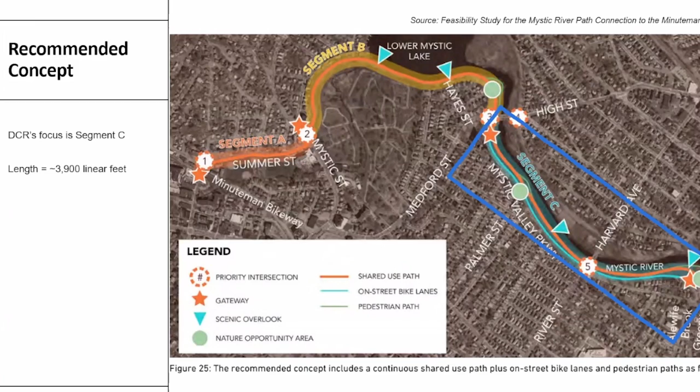Yep. Thanks, John. And then we selected the segment from where Alewife Brook Parkway comes out near the confluence of the Alewife Brook and Mystic River up to High Street, mostly because this work could be done completely out of the road right of way. For the other sections, to put in a path, you have to change the road cross section, and that is just more complicated, involves more departments within DCR, and has a higher cost. So we thought we could do this section pretty nimbly because it's all within the parkland that DCR owns. In fact, half of the stretch already has a gravel path and the rest of it is a desire line path. So that's why we're starting with this section.

In a separate effort, I'm working with our parkways team at DCR to stripe bike lanes along the road to hopefully slow down cars by narrowing the travel lanes and allowing a space for bikers that are faster, maybe e-bikes, because that's a growing concern about mixing all the modes within the parkland paths. And then we'll go right into the preliminary design, and we've highlighted all of the resource areas, and at the end we'll have a summary of all the potential impacts and a couple of questions that we have. So if you're okay with me driving, Elise, I'll go to the next slide. Yeah, go for it. Yep. All right.

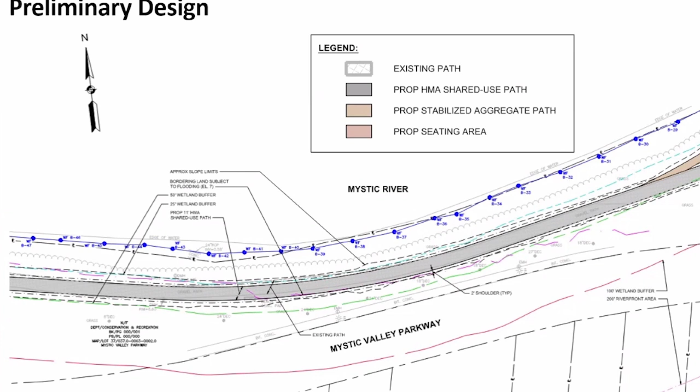And as we get closer to the end here, where we are meeting up with the crossing at Alewife Brook Parkway, there's a lot of parkland and not a ton of trees in this area. So it might be a good idea to create a great area for maybe some seating, do that stabilized aggregate path, maybe some signage. Any of that type of stuff would be great at this location.

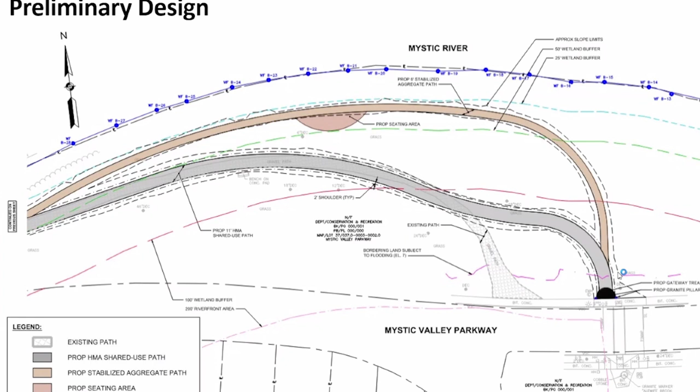And one of the things we noticed is this whole area up near the crossing of Alewife Brook, because the existing path comes up just to the left of that crossing, as shown in this graphic. That whole area is dirt because people just cut right up through there. So the idea would be to align it more with the crossing so people would hopefully stay on the path getting to the crossing and just continue across, and hopefully keep that grassed area more grass.

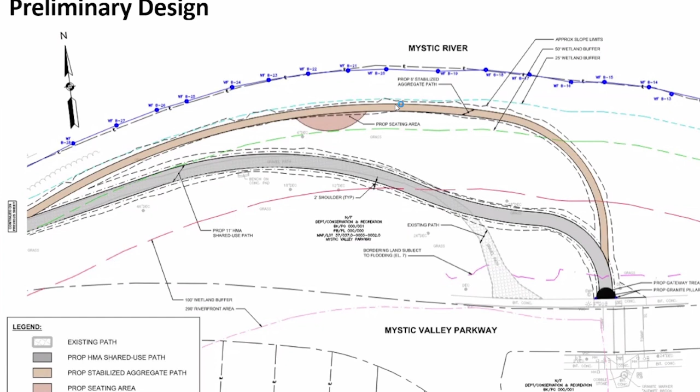Another element from the feasibility study was identifying overlook and seating areas, referencing where people are going to the river now for views. So that's why we came up with having that seating area there. So the next set of plans is ultimately the same set, but I tried to highlight something different. This gives us an overview of where we are impacting.

So the resource areas that we focused on at this point, and we have shown in all these different colors, and I think we're happy to share the plans with anybody if they want to look at these. It's very hard to always zero in on stuff on a screen when you're making a presentation. So happy to share the preliminary drawings if that helps.

But we're showing the 200-foot riverfront area, 100-foot wetland buffer, 50-foot wetland buffer, 25-foot wetland buffer. Our wetland line is in the bright blue along the bank. And then we also have bordering land subject to flooding at elevation 7, which is another aspect of what we are working through once we get the alignment set, is how will we compensate for any impacts to the floodplain in this area and where those impacts occur.

So we quantified what we have at this point, and this was already after us going through this process a couple times of looking at where is the alignment, how is it laid out, which buffer areas are we impacting, and we have it summarized, I'm going to say generally at this point, just to get an idea of where we are at. So I tried to highlight different spots because I wanted to focus on different things to explain why we made the choices that we made and why these impacts are occurring.

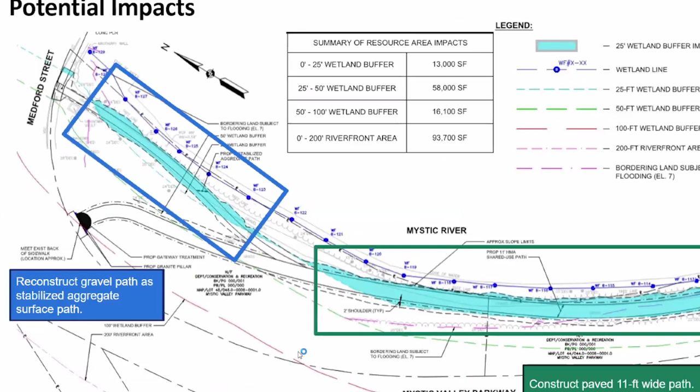And this is one of the reasons, if you want to go to the next sheet, Amber, this is one of the reasons that we tried to start pulling the path away, so we could get the path out of that 25-foot buffer. So on the left here, the green box is a continuation of the previous sheet. And then getting into this area, you can see that light blue line ends up now on the top side of the path. So we've been able to pull the path back out of that 25-foot buffer and get it between the 25 and 50-foot buffer.

We're still making an impact in a buffer zone, but we're at least able to pull it away from the river some and not have folks so close to the river. And it's an opportunity to really restore some of the vegetation through there and be specific about what points we want people to maybe have that access.

I will note too, this existing conditions gravel path is really a spectrum of how you define a gravel path, because further down by Alewife, it feels more like a real gravel path. And here it's almost like compacted earth. Maybe there was some gravel, just to acknowledge that it's a little different, but either way, it's very compacted, if not actually fully gravel. So just to point that out.

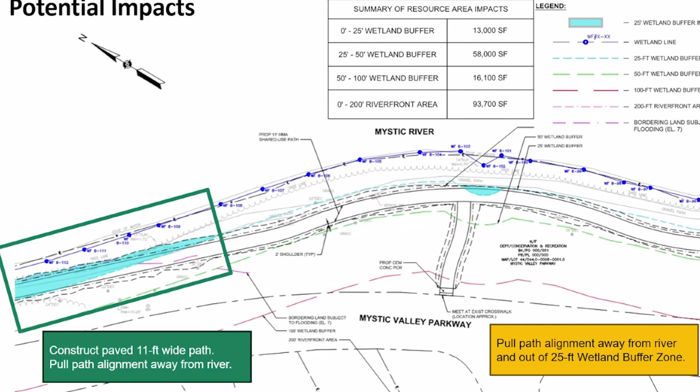Okay. So next slide, again, this highlights, and I took out the shading from the previous plan set just because it was becoming way too much and difficult to look at and explain. But you can see that the gravel path would be closer to the existing path, is closer to the wetland line. Thank you, Amber. And we tried to pull the path out of that as much as we could. So the only area in there that we're really impacting is some of the grading, the shoulder, and it's likely to be a grassed area through there.

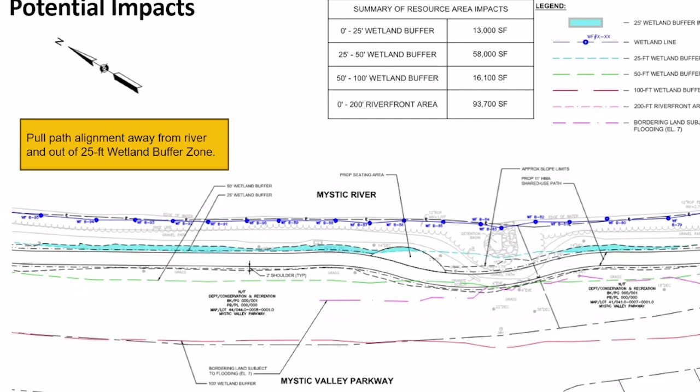So that was our main goal, anywhere that we can pull it out of the 25-foot wetland buffer without impacting trees and having to really overhaul the land. That was the approach that we took through here. Yeah, so that's another thing, we're aiming not to disturb any mature trees, because there's quite a few in here. We know that's a really critical part of this parkland.

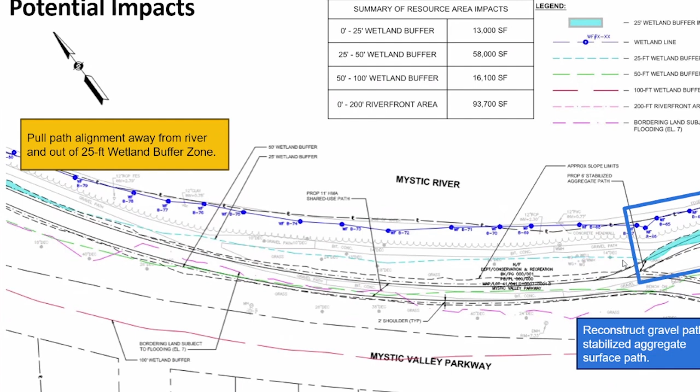Yeah, and so this same thing, we pulled the path here completely back out. Some of this area is even pulling it even further out. And then again, as we approach River Street on the right, we have that gravel path that we're maintaining through that stretch there to get up to the River Street Bridge to go over the river. And that is an impact there, but the path exists there today.

Similarly, on this other side, again, we're still in preliminary design, so we haven't really gone through some of these slope limits with a fine tooth comb, but this is an area that I see that we can likely get rid of that impact in there, pull those slope limits in, and just really get into the weeds of the design as we take it to the next step.

I had a quick question on that last plate. Yeah, sure, Mike. The aggregate path seems to stop at River Street and continue on the other side. Is there no direct connection? It connects to the sidewalk on the bridge of River Street that goes over. Our survey limits only go so far, so you can't really see it in there, but there's a sidewalk there that it's connecting to, the back of that sidewalk.

So people will have to sort of get off their bikes and walk across, is that it? Well, that's what I was alluding to earlier, is that the main path is going to direct most of the traffic here to this crossing, rather than, it almost looks like people might cross mid-block there. But this is really designed for the desire line that's connecting to the sidewalk that's going across the bridge, if that makes sense. Got it.

Yep. Yeah, it kind of depends on where people are going. We were out there doing several site walks. We saw people just walking straight up there and walking over the bridge. And there might be some people with bikes, however they choose to do that. But the main line is essentially along Mystic Valley Parkway. And there is no curb cut here either. Yes, correct. Next slide?

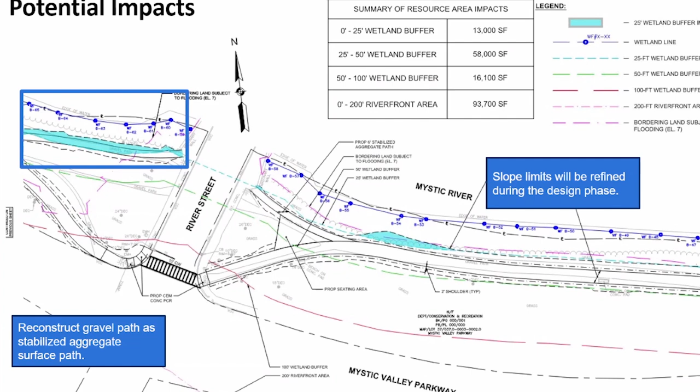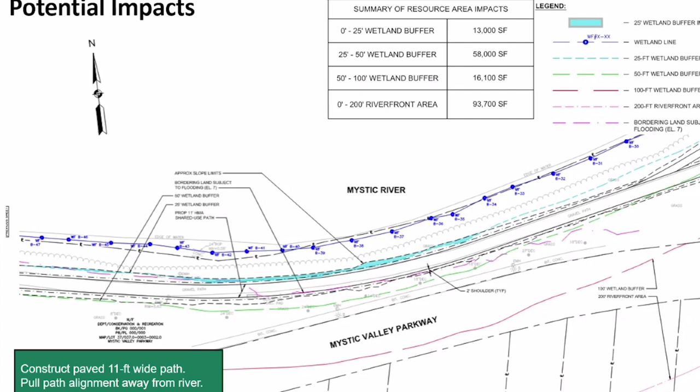Yeah, okay. Continuing on. This is a section where the gravel path, we've essentially kept the limit of that existing path today, the side closest to the river, and just tried to populate it on the opposite side closer to the road. This is where it starts getting into that section, like Amber was referencing, where the gravel looks a little more put together and it's a little wider. So essentially we're just trying to pave what is a gravel path today in this stretch, and we'd be making it a little wider because I think it's probably only about 9 or 10 feet now, and we're looking to do an 11-foot width. So then as we get to the crossing here, both the gravel path and the paved path, we're able to keep that out of that 25-foot wetland buffer zone.

And then I would say this area is probably the only area that we are adding something, and it's because we're doing the dual path through here. So where there is essentially a 10-foot wide gravel path through here, we'd be putting an 11-foot wide paved path and then a 6-foot wide gravel path.

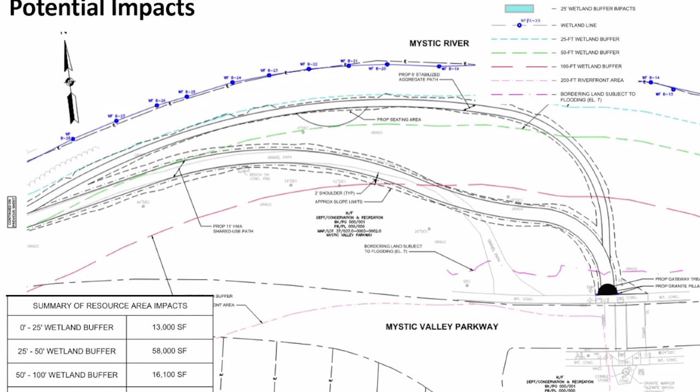So we talked about it amongst ourselves, John, Carl, David, and I, about, should we take out that sidewalk if we're putting in a new facility along here? We also want to discuss that in the context of permitting. Yeah, and I think there's a picture of that on the next slide. Yep. Amber, if you want to. Yeah.

So this is a picture of that sidewalk, just one part of it, but it goes essentially, like Amber said, from that crossing to Alewife Brook Greenway to River Street. And we just did some quick calcs to see, okay, if we wanted to remove that and replace it with, say, grass, make it a pervious surface, to offset some of the impact of us adding a paved surface in the parkland, we'd be looking at reducing the impervious of what we're adding by about 9,400 square feet.

So I didn't break it down. I was saying to Amber, we didn't break down the numbers super specifically and get into the weeds, which we will when we get to the point of permitting for this, but just wanted to give everyone a general idea now of, what is our impervious area? How much are we adding? And is this a way to offset that some by reducing impacts and removing this? We're not sure how many people actually use this sidewalk. It seems like maybe if there's a paved area through the park, people might be more likely to walk through there.

So, right. I think this is the end of our presentation pretty much, and then we'll take any feedback, thoughts, questions that anyone wants. Is this the last slide? Yep. Okay. Thank you. Yes, we could stay on this slide maybe. Thank you. I'm going to go to commissioners. If there are commissioners that have questions, I know I have a few, but

Anybody else? Dave Kaplan? Yeah, as far as getting rid of that existing sidewalk at the street level, I think there's a good opportunity there if you have alternative means of transportation, and like you said, could be a good offset, or maybe an opportunity for a pollinator pathway and not even grass or something like that. And also just wanted to comment, it looked like a decent amount of that stabilizer path is below the base flood elevation. Can you speak to the resiliency of that path and how it will last through any kind of flooding events?

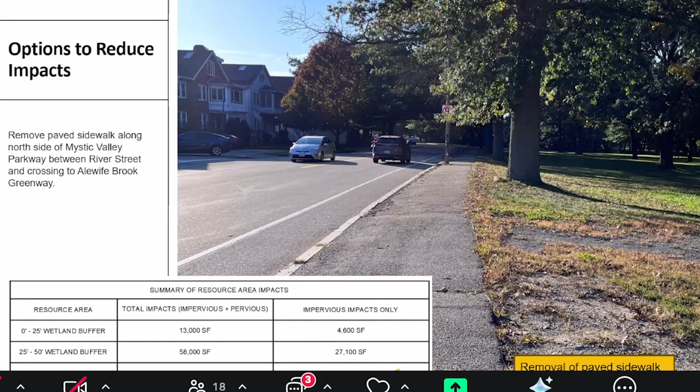Yeah, that's a great question. And that was part of the debate around having the primary path system be asphalt. We just felt like it wasn't reliable enough to withstand more intense precipitation events and such. I wasn't quite thinking about flooding, but we've had success with these types of paths when it's very flat, which it is. So I think that's good, but it is probably somewhat more susceptible to issues with flooding, and we'd have to do more maintenance. You can get into a lot of details on what type of spec you're dealing with for the stabilizer, or is it a 3/8 minus and all these different things, but it's something that we should consider. And I don't know, Lise, what your experience is.

Yeah, we've been talking about this on a lot of projects because the concern is becoming more and more apparent. And so many of these paths are along a water feature of some sort where this is a concern. One of the things that we can do is look at, like Amber said, what do we want to use as this part of this surface? There are different additives you can add into the gravel to stabilize it a little more and make it more robust so it won't break down so easily with water flooding it. I don't have statistics offhand, but we've been researching that in general for a lot of our projects, what are our options other than pavement and can any of these withstand. So I think it's something we're going to continue to pursue.

Yeah. We actually have a great test case around the corner, which is the Alewife stormwater wetland, which we recently resurfaced after, I think it was 12 years, and particularly one part of that stabilizer path, if you've been around it, where there's boardwalks and things into that wetland, part of it is actually in a designed spillway. So there were a lot of flood events going over the stabilizer path, and that was the organic lock, Elise. Yeah. And it mostly withstood. Now, it did wash out more than the other ones. So when we went to refresh it this past fall, we had to put more material back there. But that means it had kind of accreted into the stormwater wetland too.

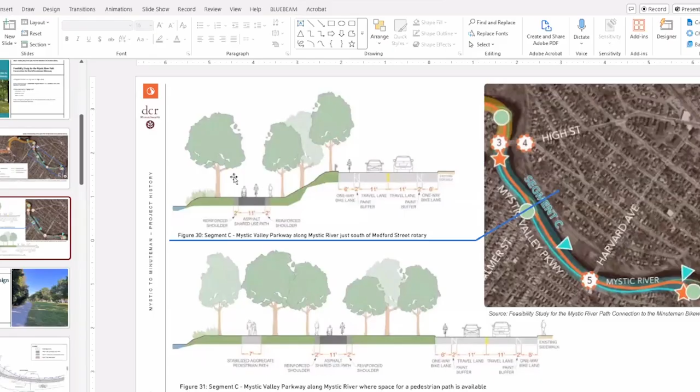I have reservations myself about putting asphalt within the 25-foot of the river. I know that there's a gravel path, and the Mystic River Restoration Project was kind of my baby, so I know that area really well. I am concerned about improving it rather than adding asphalt. There are additional broken outfalls along that stretch. Some of them are Arlington's outfalls. Some of them were DCR's that were fixed. There are still broken outfalls that are Arlington's.

There's an opportunity maybe to improve the water that's getting into the river, improving water quality by fixing those outfalls. Maybe there's an opportunity there to offset some of the impacts of this project as well. But I am concerned about asphalt closer than the paths are now to the river.

And I think it was just public sentiment was strong about access to the river, and people like to recreate there. And part of it, there's parts of the section where you're more connected to the river, and there's parts where it's quite a bit higher as you get up towards High Street, Route 60. So it has a different feel in those 2 locations. Right, because there's also a very steep slope in some of these areas from Mystic Valley Parkway down to the river. I mean, it's pretty steep. This is the steep area. It's a little bit flatter down here.

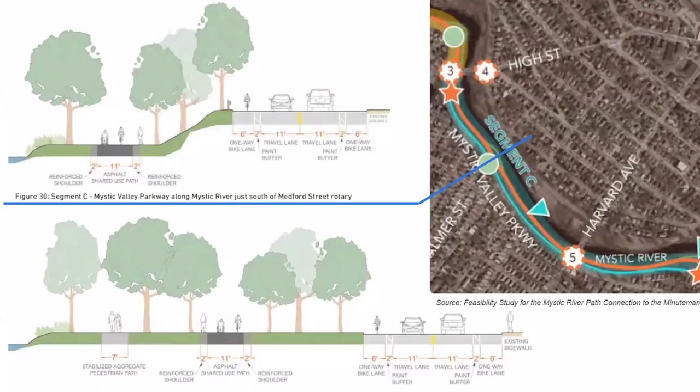Because I'm more inclined to allow a path, even an asphalt path, where there's one already, where I know it's very compacted, it's not infiltrating, those paths are not infiltrating. I know that. So I'm more inclined to be okay with allowing an asphalt path where there was one already, rather than a new one. Unless that new one is at least outside the 25. This is just my point of view.

I do agree with taking out that asphalt. So I do see that you have the impervious impacts, but I guess what I'm saying is within the 25, how much of that 4,600 square feet was there already? Yes, and we can calc that. Okay. I was trying to anticipate what might come up. No, that's okay. That's why we're having a conversation. Yeah. So that's important to me, to know what's existing. Totally. In terms of that gravel path, which we know is not impervious.

And I would like to see some consideration, as we've heard, for habitat enhancement. To me, that's not just planting, that's also water quality. And those outfalls are a problem. And they're not that expensive to fix. We did the Mystic Riverfront restoration, that little restoration area, and that was probably more than what you need to just fix an outfall, because of course we put a swale in there et cetera. That was like $50,000 or less. I mean, it wasn't a huge amount of money.

And so to fix these other 3 or 4 outfalls that actually belong to Arlington, I think most of them are in that area, at least 3 of them. I'd like that to be a consideration for improving water quality, and it'll improve flooding problems, because of the overland flow. So I'd like to see that as well. So are they all owned by Arlington in this stretch, or? No. Really? I can have David Morgan, I can show him where those outfalls are. And I can have him send them to you.

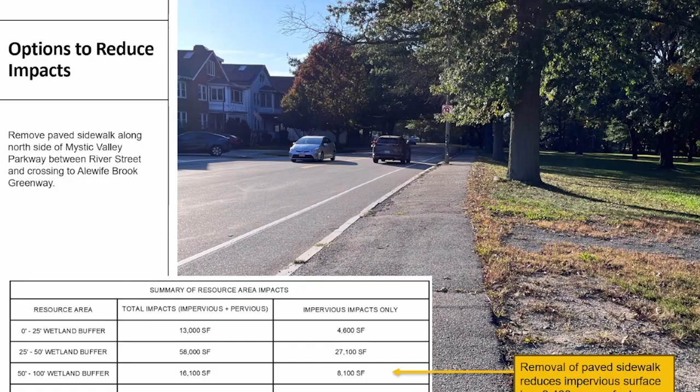I thought I saw Susan Stamps' hand up, but now it's down. So I don't know if you wanted to make a comment, Susan. And please introduce yourself. Hi, yes, thank you. Susan Stamps, Grafton Street in East Arlington. I'm over there all the time. I got here a little late, so I didn't hear what your plan was to do with the existing sidewalk from the Route 60 Rotary up to the intersection with Mystic Street. I think maybe you were planning on widening that?

So that stretch was in the feasibility study that was done in 2022. And that's being broken out as a separate project from this, because in order to widen that, we have to change the road cross section. So it's just more complex. Oh, I see. Whereas this one is all within the existing parkland. So it's Route 60 down to Alewife Brook Greenway. Oh, okay. So it's all part of a bigger vision, but we're segmenting out the implementation pieces.

Oh, I see, because I would hope to see some trees or some kind of screening between the pathway of the sidewalk, whatever you want to call it, in that section between the Rotary and Mystic Street, because it's a truly terrible place to walk. And it's so beautiful there along the lakes. It's beautiful, but right beside the cars is pretty bad. Okay, thank you. Sounds good. But I do agree with Brian, his concern about habitat.

Thank you, Susan. Is there anybody else from the public who would like to make a comment? You can use the raise hand function in the reaction button at the bottom of your screen, or just wave. I don't see anybody. Do you see anybody, David? No? Okay. So I'm going to close the public comment section.

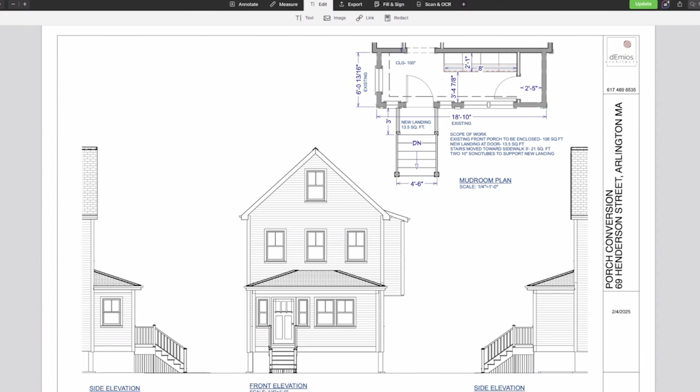Could you show us, I know in the materials you submitted, there was a figure at the end that showed the jurisdictional areas. It's helpful for the commission to see. Do you have that? Do you mean the survey? Yeah, the stamped survey. There we go. Am I showing the survey right now? Oh, sorry, I don't know what happened there. Okay. I can make this bigger.

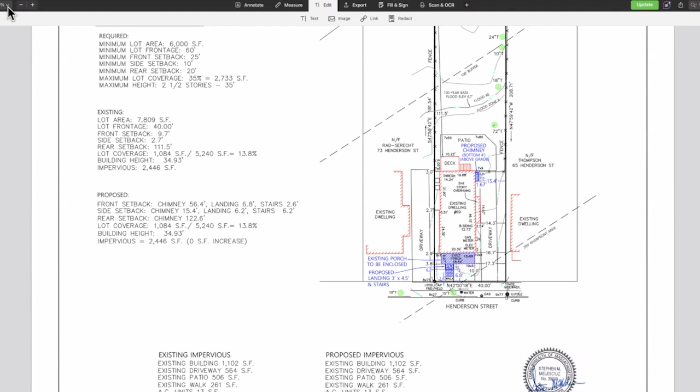So this is where the porch is, and this is Alewife Brook Park back here. So it's within the 200-foot riverfront area, but just slightly. And you're proposing not to add any impervious surface because you're removing pavers? Yeah, there's a paved walk right now that goes from the steps, and they're being pushed out about 3 feet toward the sidewalk. So I have to go to the zoning board of appeals for that.

This area underneath the landing and underneath the stairs, I guess is considered permeable, because of the possibility of water getting between the pavers. Right. Well, those pavers will be removed where it's being extended out. Okay. And the porch itself has a roof right now, proposing to enclose it. So the porch itself right now is considered impervious. I just want to make that clear to the commission. Okay. Yes.

Are there questions or comments from commissioners about this work? Dave Kaplan? Yeah, I had a question. What's the proposed chimney there on the backside? Is that part of this project? It is not part of the project. I tried to get the surveyor to take that off, but it's not really a chimney. It's actually a firebox that's cantilevering off of the house in the back. That is a simultaneous project already being built, but it's not touching the ground.

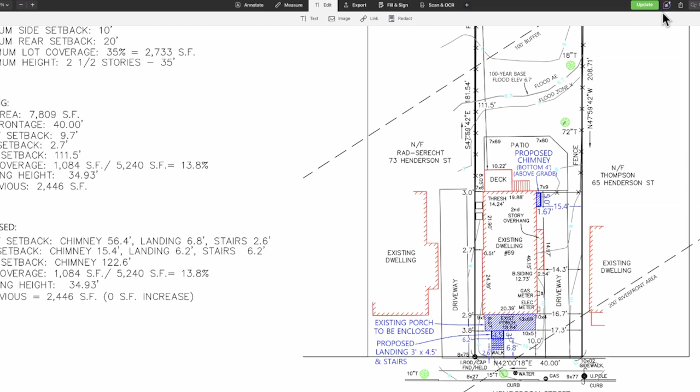Okay, so, oh, I forgot to open for public comment. That was terrible of me. Actually, can I just see if there's anybody in the public who was going to make a comment for this? If so, I will open the hearing again. I don't see anybody, so I think we're safe. Okay. I don't have Nathaniel here to tell me what I'm forgetting to do.

Okay, we're going to go on to open the hearing for the notice of intent for 995 Massachusetts Avenue. This is a hearing to consider the notice of intent under the state Wetlands Protection Act and the Arlington bylaw for wetlands protection for parking lot reconstruction at 995 Massachusetts Avenue, which is in the buffer zone, an adjacent upland resource area that's 100 feet, and riverfront area to Mill Brook, as well as the buffer zone and adjacent upland resource area to a bordering vegetated wetland.

And I understand that we have Hancock Associates here. Do we? Yes, good evening. My name is Tony. Tony Donato from Hancock Associates. Thank you, Tony. Thank you for your time. If I could share my screen here, I have the plan pulled up.

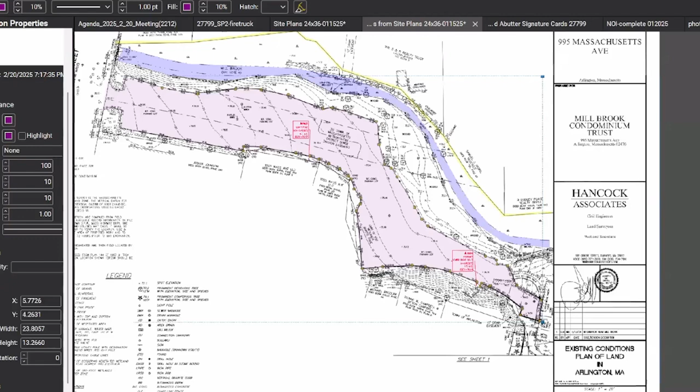Tony, are you showing another screen? Because we're seeing the original screen where it's just the Google view. Oh, okay. I think maybe it didn't transfer. I might be sharing just a window by accident. Let me try that. Is that better? Yes, I think that's what you meant. If you could make it a little bigger, that would be great. I'll try. Let's see.

So again, this shaded area is the existing parking lot. The yellow line here is the north end of the property line, which extends over the Mill Brook, which is shown here in blue. And access is from Brattle Street. And I have some photos here of the site just to give you an idea of the condition of the pavement. Here's the access to the garage.

Here's the photos of the existing ADA parking that doesn't meet MAAB requirements. Another shot of the parking lot. And the Mill Brook is on the left, the alligator cracking. Another shot of the edge between the parking lot and the brook. And here's a picture of the brook itself.

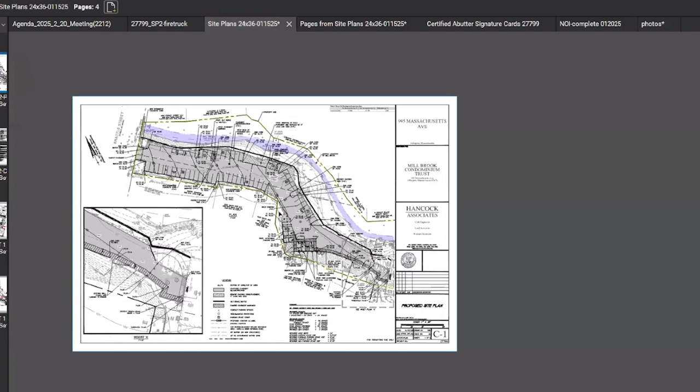So just to talk about this plan here. What we're proposing to do is reconstruct the parking lot, just repave it and then restripe it to meet zoning requirements. And then at this corner here, we're going to be providing 5 ADA parking spaces and an accessible route to the garage entrance here.

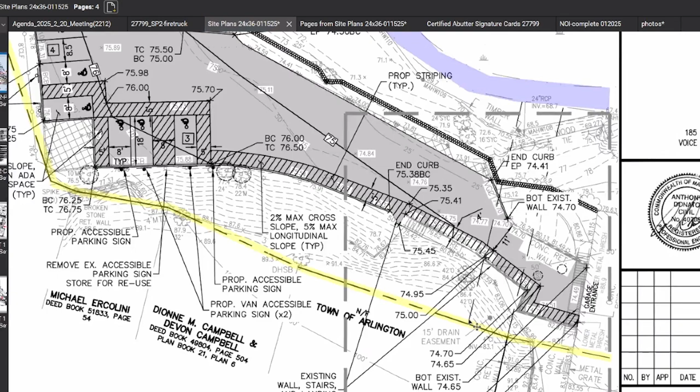Currently, the stormwater off the site kind of sheet flows towards the Mill Brook. There's no stormwater management controls. What we're proposing to do as mitigation measures, we're only providing what we need for parking, and the 24-foot access aisle is required by zoning and just traffic engineering requirements.

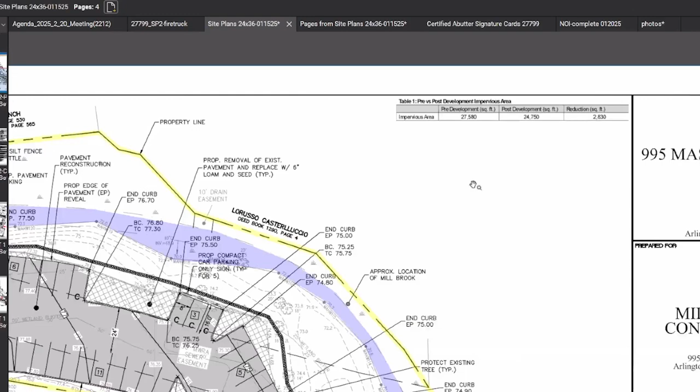These shaded areas here are paved areas currently that will be removed, and then we will replace with loam and seed. So they would be vegetated, and some berm provided around these landscaped areas. So overall, there's going to be a 2,800 square foot reduction in the amount of impervious for the parking lot.

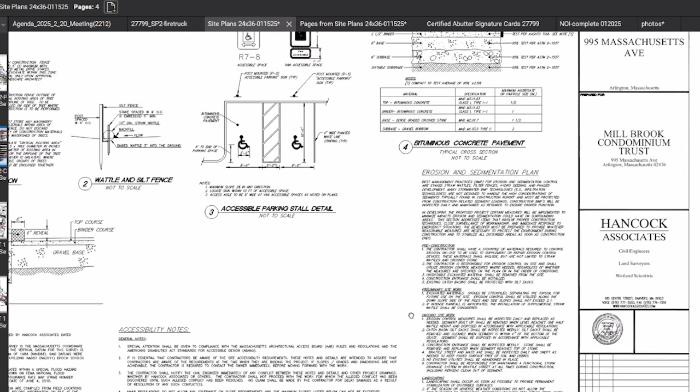Excuse me. Now, we will provide erosion control at the edge of the parking lot. There's an operation and maintenance plan that's included within the stormwater report. There's an erosion and sedimentation plan provided during construction, and some construction details, general notes.

As I understand, there's a couple issues right now with the project, and specifically Mr. Morgan advised me to check with the fire department just to confirm that they are satisfied with the access to the site. I did provide Deputy Melly with a plan earlier this week. I think he's been out of the office a couple days. I sent him this fire truck turn template. I'm waiting to hear back from him.

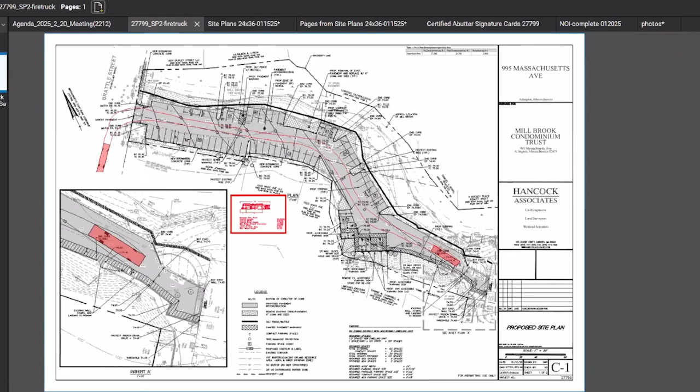It's kind of mimicking existing conditions. We're kind of limited on space and what we can provide. We can't provide a turnaround at the end, but it does access the back of the building without crossing over any parking spaces.

And I am aware that there's an enforcement order for some work that was done on our parcel by an abutting property. I believe it's this Lorusso Castelluccio. There was some encroachment over here that the condominium association is working with them to try to get that resolved. And as I understand, if there was a vote or some kind of approval for this, it would be conditioned that work be done first, and that's fine if we get to that point.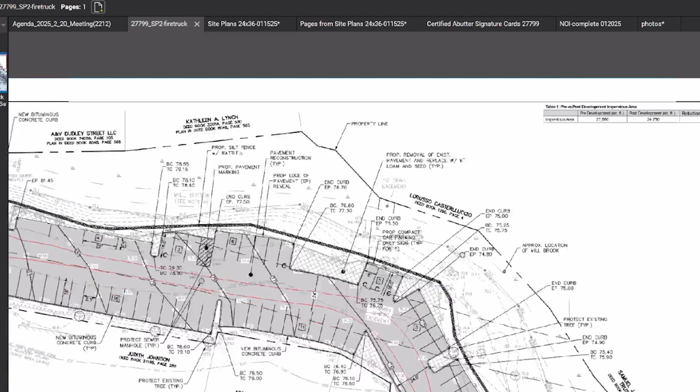So given that presentation, I just open up to the commission if they have any questions or comments. Thank you, Tony. I have a few, but I'll open it up to commissioners first for questions. Dave Kaplan. Yeah, thanks for that presentation.

I guess my first question is, how is the work going to be conducted for the resurfacing of the driveway? Is this just sort of a mill and repave, or are you doing full depth excavation? What's the extent, I guess? The contractor I talked to, they did send us out for pricing to a paving contractor, and I believe he's just going to pulverize in place, and then maybe they'll skim off a couple inches or whatnot, and then just pave over it.

Okay, so there will be sort of a base course left that you're working with, because when I look at this project, it's listed as redevelopment, and you're improving existing conditions by removing existing impervious surface, but I don't see any analysis consistent with the Stormwater Handbook, Chapter 3, Volume 2, to meet those stormwater standards 2 through 6 to the maximum extent practicable. So I just wanted to know what sort of analysis you did that we could review, that shows the opportunities and the constraints to meet those stormwater standards.

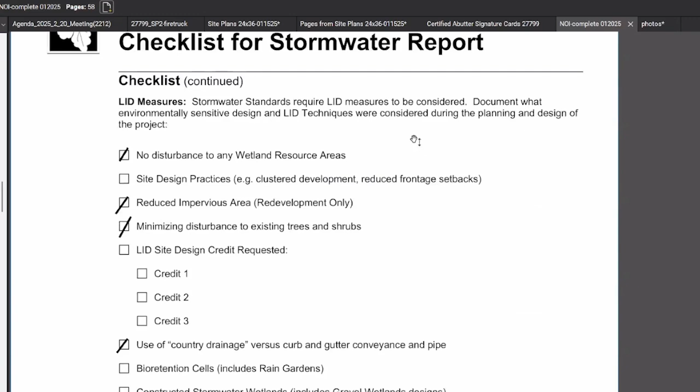So here we go. Right, yeah, but specifically, what did you do in terms of evaluating recharge opportunities? What did you do in terms of evaluating 80% TSS removal opportunities? And what are the opportunities and the constraints to meeting those to the maximum extent practicable?

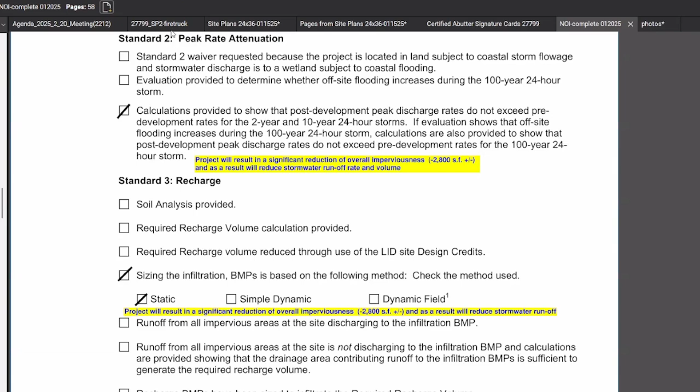Well, the opportunity would be we would have to install a closed drainage system on the site and provide some recharge. We'd have to do a test pit. I would assume that the water table is relatively high, given the brook, the stream next door, and then we'd have to create a closed network pipe system within the parking lot, and then find a spot and then discharge it out to the brook.

So I mean, I guess that would be for full compliance, but I just didn't think it would be warranted, given that it's just a repaving project, and the intent is to meet MAAB requirements for parking, provide striping, and then just to kind of upgrade the parking lot, just to get rid of the potholes and the cracking of the pavement.

So, right. I mean, I guess that would be the extent, is to provide a full drainage system, direct at some low point on site, add some catch basins, and then some infiltration or mechanical separator. And then we'd have to create a point source discharge out to the Mill Brook. Okay.

I see other hands up too, but did you have a follow-on question, Dave? I thought that was a good question. Yeah, no, I did. I guess, what is the plan for those areas that you're removing the impervious surface from? Can you just go over those real quick, please?

Yeah, so we were going to create a berm, Cape Cod berm around these areas, and then we were showing with 6-inch loam and seed. I mean, if you guys prefer some plantings there, we could possibly add some trees or something to the site, or bushes. Right. And I guess, yeah, I have a lot of questions. I'm sorry.

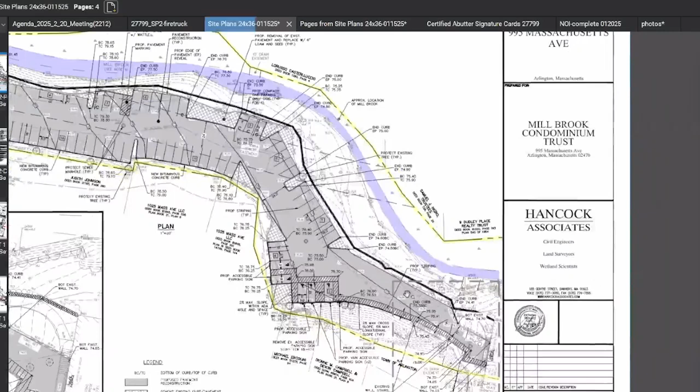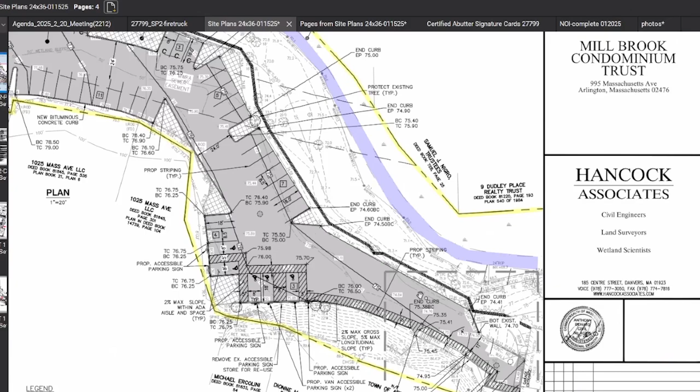I was actually thinking about this myself, and I was thinking what we could propose is maybe a jute netting along a specific edge, or some kind of geotextile, just to make sure that the plantings have sufficient time to germinate and minimize any chances of erosion. But other than that, in order not to really change any of the drainage flows, I was just showing the grading to match existing. Okay.

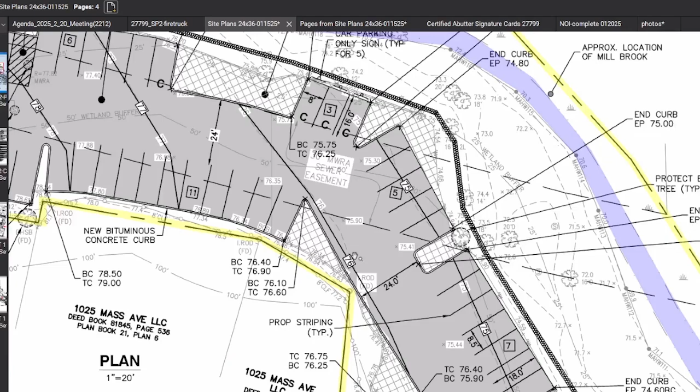Okay. David, you done? Yeah. I have a lot of questions too, but I see a lot of hands up, so let's keep it moving for now, and we can come back to you if you need. Thank you. David Morgan, and then I'm going to go to David White and Brian McBride.

Sure. So the points Dave Kaplan made, I think, are valid, good ones. Stormwater analysis makes sense to me in this context, and I may be wrong, but I don't think you can do a point source discharge to a body of water like that under the Clean Water Act. So you'd have to tie in probably to a town system, which is additionally complicated, or at least into an existing outfall. There may or may not be an existing outfall on site.

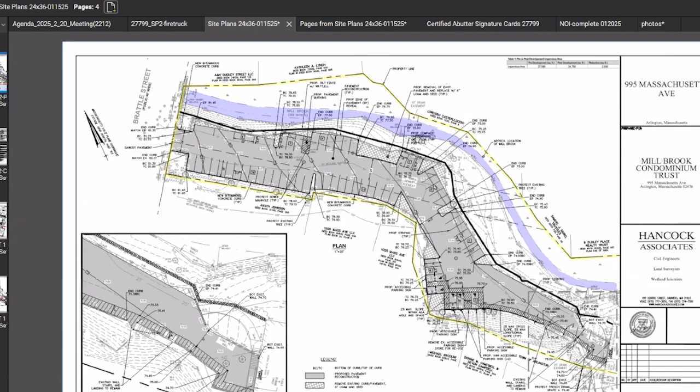But setting that aside, I wanted to just point out to Tony, there's a recent town bylaw that pertains to parking lot reconstruction and the amount of shade that needs to be installed. So I think that we need to determine whether or not that bylaw is applicable in this situation, and then have the plans reflect the forms of mitigation, basically, for shade that need to be incorporated into the plan when we get a resubmission for supplemental materials.

So that just occurred to me tonight, that this project likely does qualify, and we need to work that out with, I don't know, maybe inspectional services or legal, since it's a new-ish bylaw. Then they would make some kind of determination about the applicability. Anyway, I wanted to flag that for later because it likely has an effect on mitigation plantings, for trees providing shade. Thank you.

Thanks, David. I wasn't aware of that either. David White?

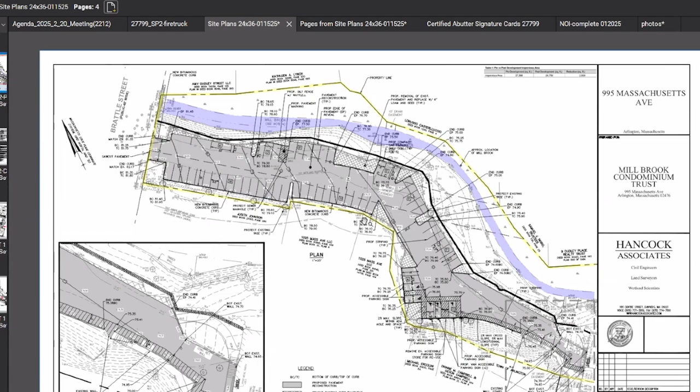Yes, I'm also concerned about runoff and drainage issues as well. I think it's a difficult spot here. I'm wondering also maybe some rain gardens or swales might be possibilities in terms of managing the runoff from the parking lot. And I believe there is an outlet at the far eastern end of the parking lot, off the building, I think. That's my comments for now.

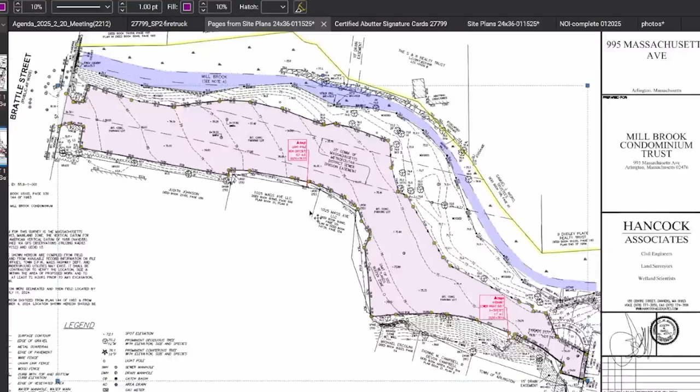Thank you, David. Brian? Yeah, I was just going to ask the same question David did. And so just to add that this is a big heat island. Obviously, with global warming, it's going to become more of a problem. So it would be great if the applicant would consider trees along the perimeter to give shade, even if it turns out this is not required under the new bylaw, which I'll paste in the chat. But I think it would be a good mitigation in either event. Thanks.

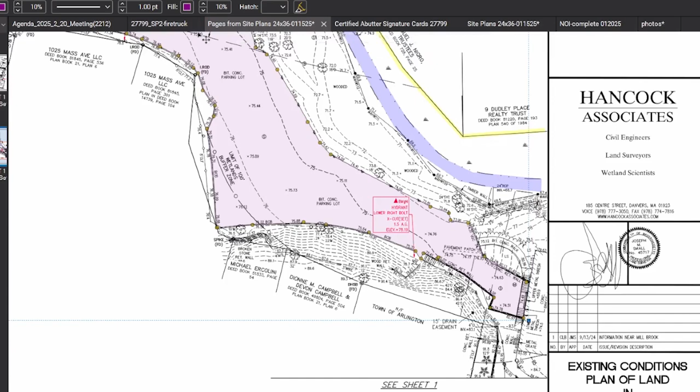Thank you. Mike? Yes, I'm somewhat familiar with this site and it is pretty flat. And my observation is that the runoff goes into those vegetated areas between the parking lot and the stream. My only question is that that works fine, perhaps to slow the runoff. But during the winter, when those plants are not in place, I'm wondering if there's any concern about winter flow versus summer runoff, because it's pretty darn flat. So I don't think there's any chance of gullying or major erosion, but just wondering about the difference between summer and winter flows.

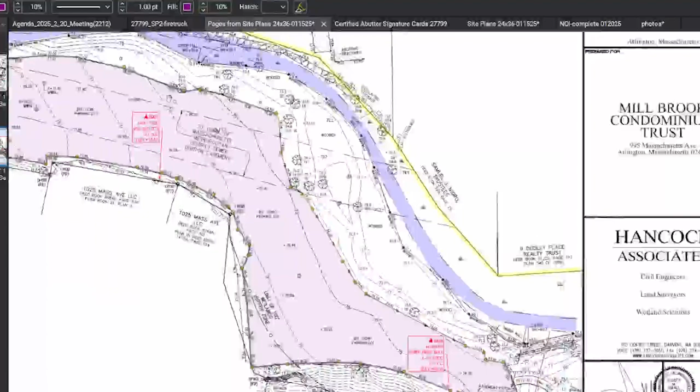Well, Mike, when I went out there and took these photos, it was in August, and as you're aware, it was pretty dry that time of year. With the snow now, I haven't been out there, but I think your point of the site being kind of flat is right. The curb's kind of broken along here. I guess there are some spots with berm, but it's not really channelizing and flowing at a point. It's kind of just an even sheet flow off the pavement for the most part. And there's these large trees around here that kind of hold the soil together. So I don't think it's an issue.

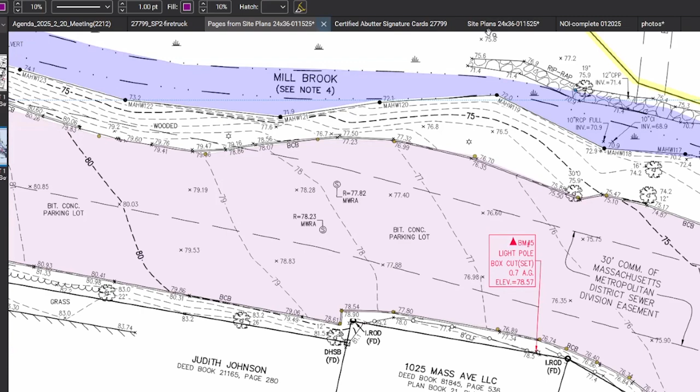We're not removing any of these trees that are along here. And again, if we plant more trees, and then my other suggestion would be that along this edge, we provide a jute netting or some kind of geotextile underneath just to stabilize that soil until the vegetation gets rooted, or just to help it come along. Did you have a follow-up question, Mike, or was that it? That was it for the moment.

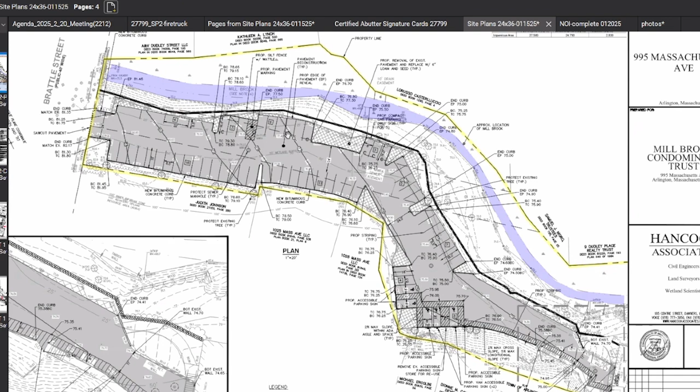Okay, thank you. I don't know if David Morgan or David White raised their hand first. Mine's short. Okay, go ahead, David. Question about snow storage. Where does the snow get stored in the wintertime? Yeah, what do you do with snow plowing right now, Tony? Do you know? I do not know what they do. That's a good question. I can ask the property manager on that. I assume that maybe they pick a corner, or if it gets out of hand, that they would truck it off site. Right, because of course it can't get stockpiled close to the brook. That's not allowed. Okay, thank you.